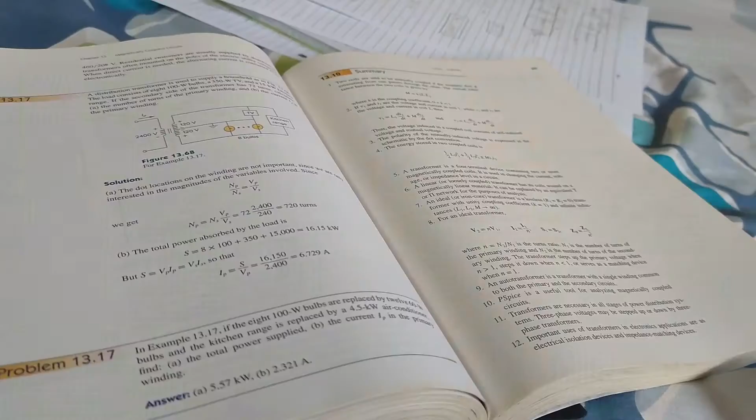Who is that? Did you know sitting on a chair for too long can cause numerous health problems? Such as obesity and a cluster of conditions that will increase blood pressure, high blood sugar, excess body fat around the waist, and abnormal cholesterol levels that make up metabolic syndromes. And prolonged periods of sitting also seem to increase the risk of death from cardiovascular disease and cancer.

What do I do? Don't worry. I have a device that will help you and your sitting problem, which is called the posture correcting alarm. How will that device help? Well...

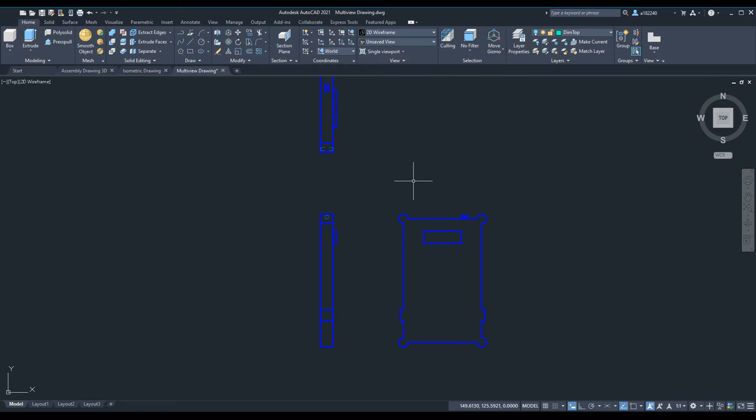In this video, I will show you the procedure of the multi-view drawing. Here you can see the side view, the front view, and the top view of the initial concept of the device.

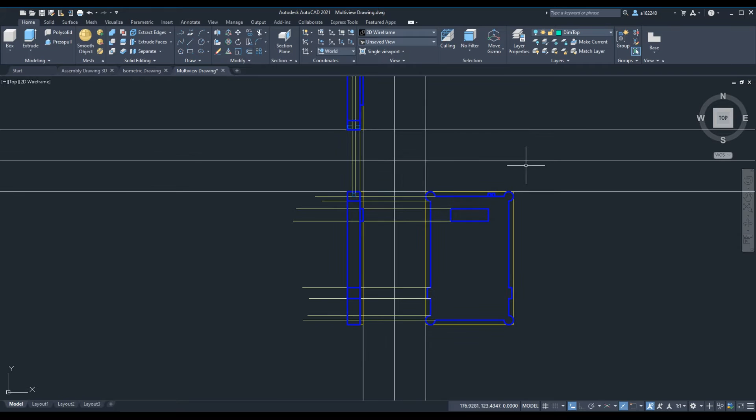The first thing we need to do is draw the construction line on a different layer from the object line. After we draw all the construction lines, we can start with the object line, which I draw in a different layer.

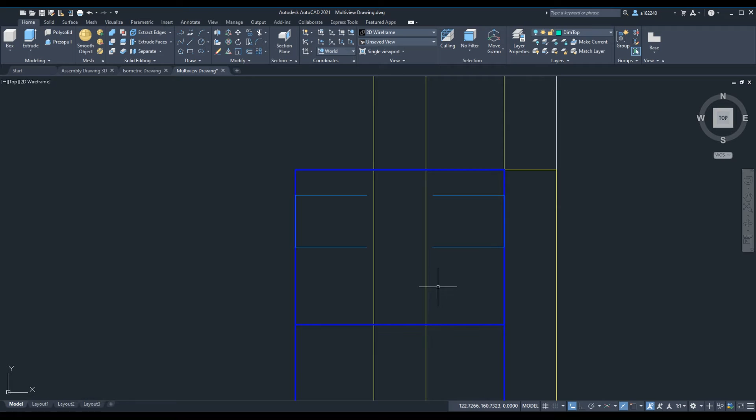After finishing the object line, we need to draw the hidden line. Here you can see the hidden line is not really hidden, so what we need to do is make a correction. Now you can see the hidden line.

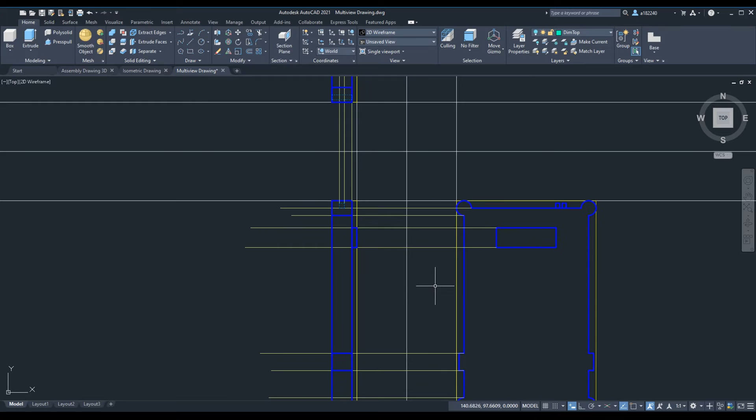After finishing with the hidden line, the next thing is to put the dimensions of the object, the measurements. So what I did is create a new layer called dimension and put the dimensions, the measurements, and even the radius of the circle in this layer.

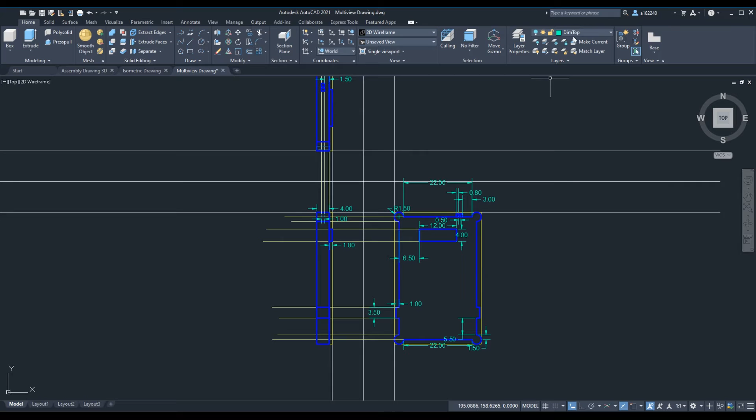After finishing with all that, we can now hide the construction layer. Here you can see the final multi-view drawing of the device. In the bottom left corner, you can see the layout page with the final drawing of the device, which you can print.

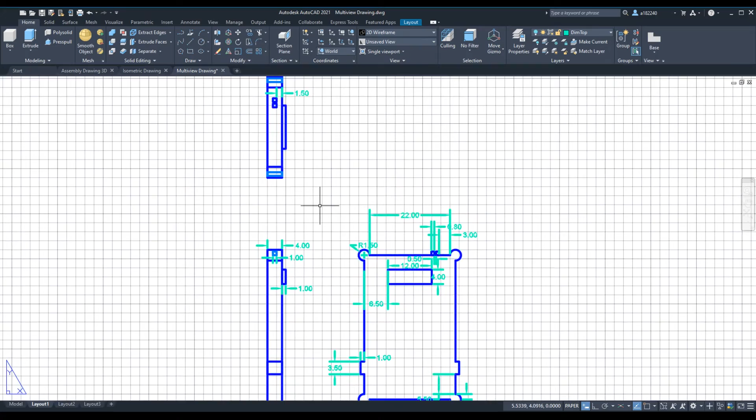The concept of multi-view drawing has led to the isometric drawing of the device. We can see that the multi-view drawing from the previous video has led to the isometric view of the device at a 30-degree angle from all the sides, axes, and corners.

The drawing projects a view for visually representing the three-dimensional object, but in a two-dimensional view. It is an axonometric projection in which the three coordinate axes appear equally the same.

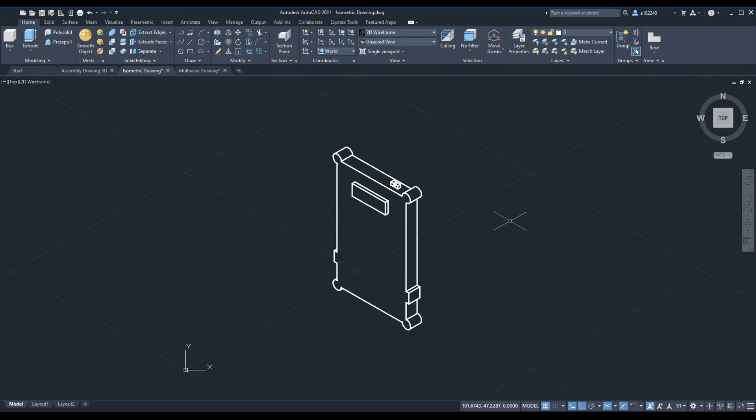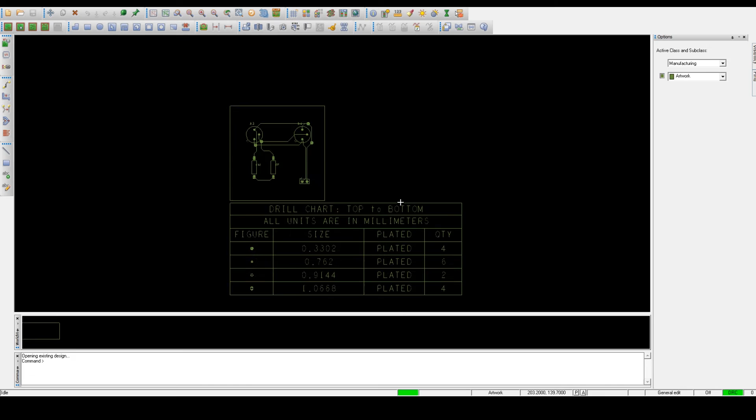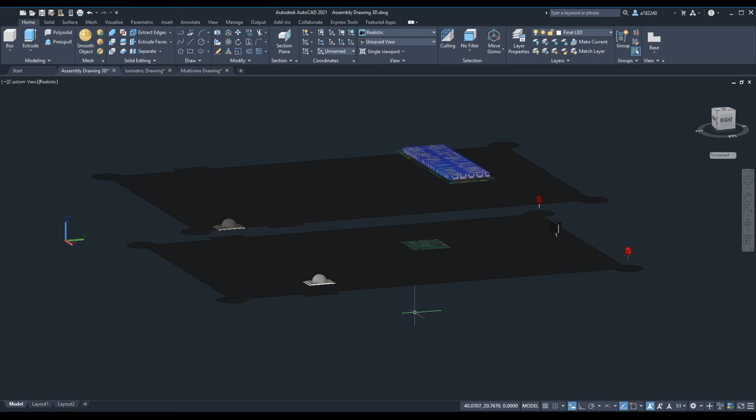Next, I will explain the design of our project. This device is a board shape with 28 cm width, 43 cm height, and 5 cm depth, with a curved end, or a quarter circle with 1.5 cm radius or 3 cm diameter at each end, and only compatible on chairs with back support.

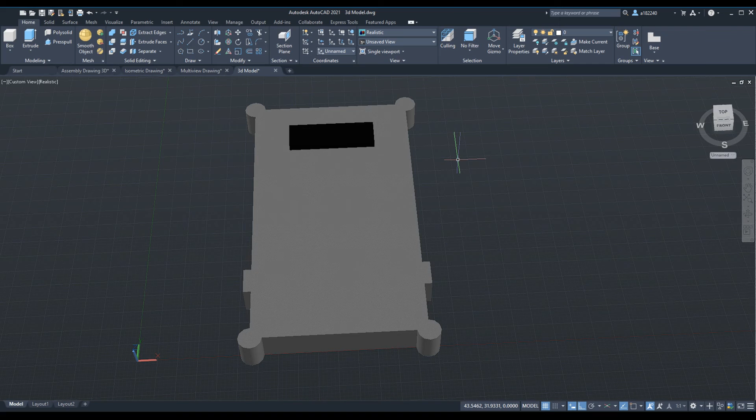Posture sensors are built using two Raspberry Pi as the main components attached with other components on the board. There are two buttons on this device that will be used as a timer. Button A on the left side will be used to set the timer. Button B on the right side will be used to start, reset, and end the timer.

There is also a buzzer that will give a warning when the time reaches its limit or when a person sits in the wrong posture. The LCD will be used to display the time that has been set and to flash the warning sign. On each side of the device, there are square bumps that allocate the sensor, the passive infrared receiver.

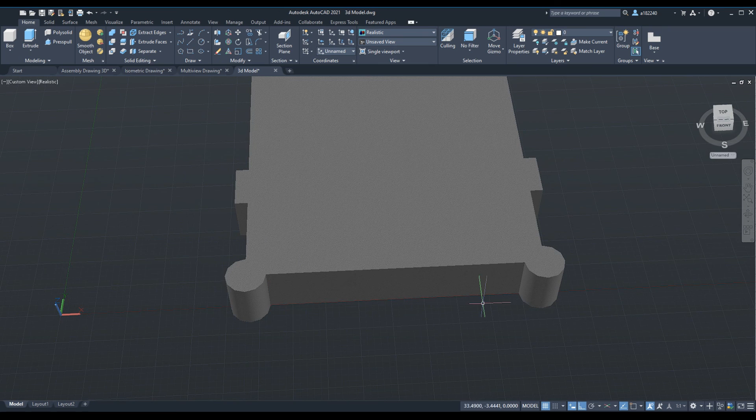The design of the curved end is to reduce the impact of collision. Both bottom ends are left empty to reduce the impact, while the top end is to allocate the buzzers and LED.

As a conclusion, this device will be really helpful for those who want to maintain the right posture throughout online classes or when doing their work. Not only can it help with the health of the students, but it can also help to ease the online learning process.